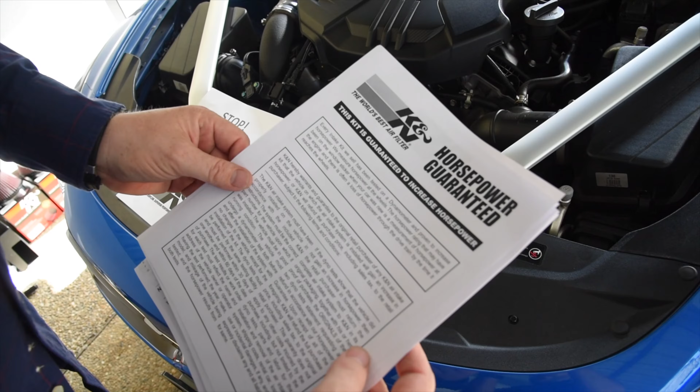This car is owned by one of our friends. Given how restricted the factory intake was, we were keen to get our hands in the engine bay and get rid of it. Replacing the factory system would be one of K&N's Typhoon intake systems.

This kit is named 695318TS.

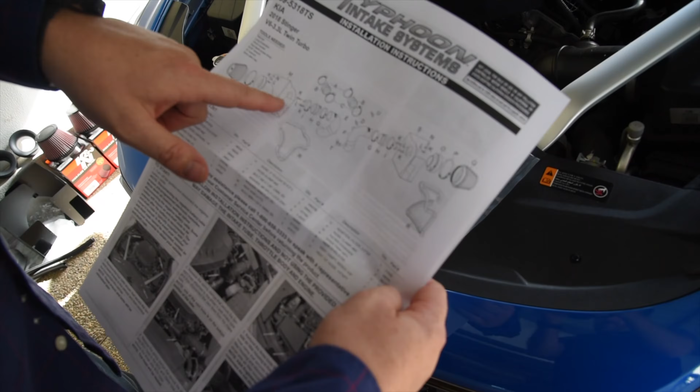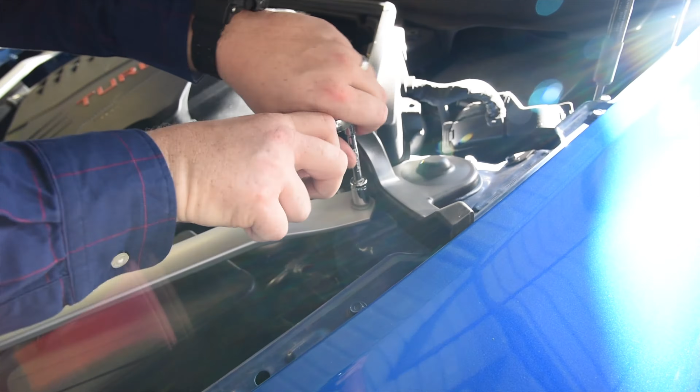The system consists of a cold air intake system which features mandrel bent aluminium intake tubes for each side, a washable reusable high flow K&N air filter for each side which comes pre-oiled, as well as custom heat shields that help protect intake air from the high temperatures of the engine bay.

K&N states this system can be typically installed in less than 90 minutes.

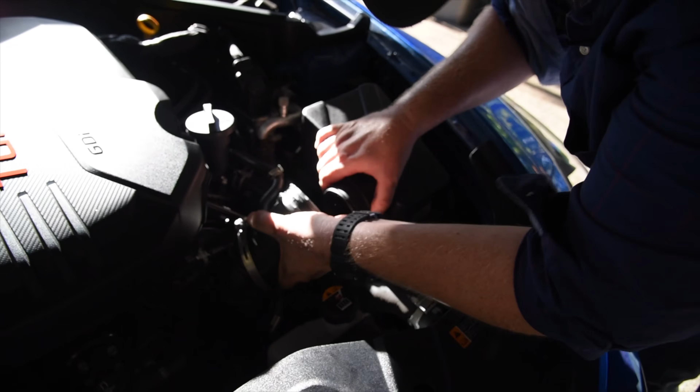The instructions say to loosen the hose clamp that secures the intake tube to the passenger side turbo and then remove the intake tube from the vehicle.

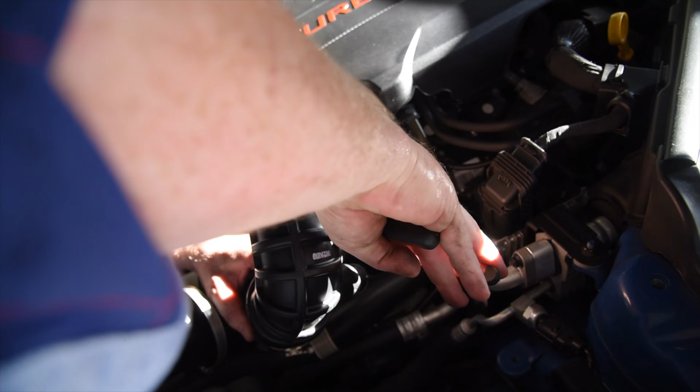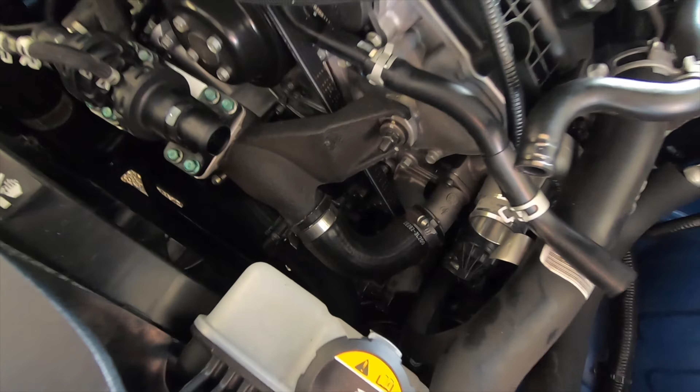Alright, as you can see, all the air boxes are out now. You've got the turbos just down here, we can see the inlets. And all the plastic and all the hardware and hosing and clamps and stuff is all out of the engine bay. Now we're up to number 10.

Basically this side is where we start installing the adapters that sit within the engine bay itself. These act as a heat shield.

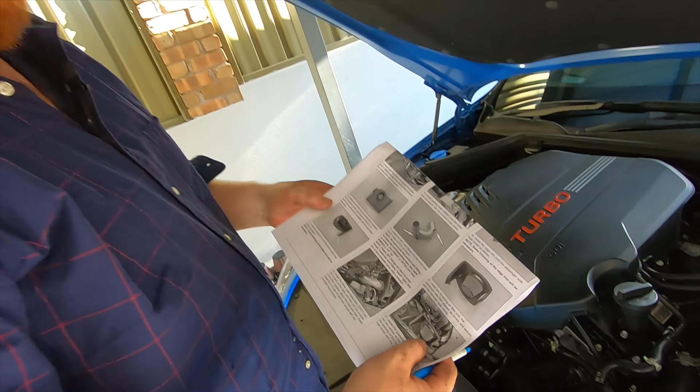This is the driver's side heat shield, and the way we know that is there's a serial number here. This ends in 253. And basically on this parts guide here, it's got under M, this is 253. So this is the one we need to do. So let's go back to where we were.

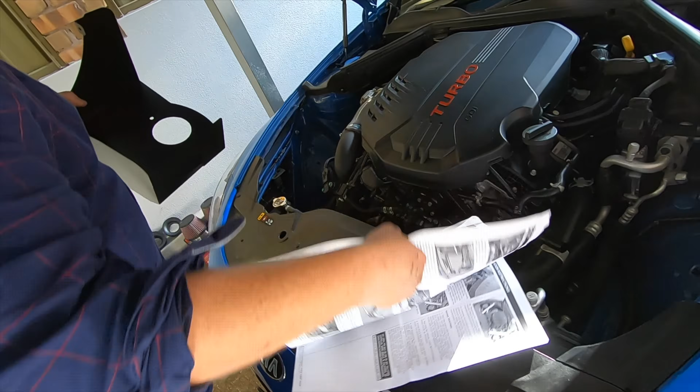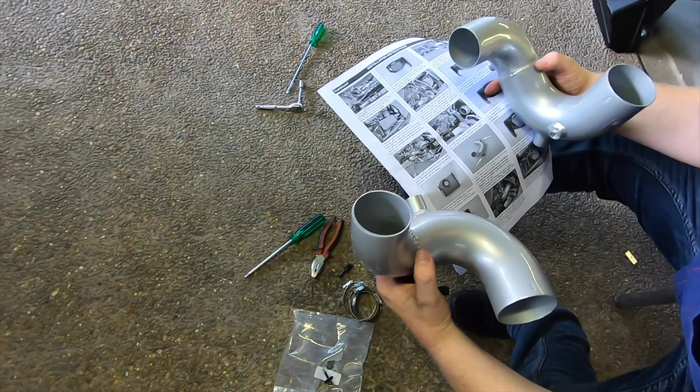Now the real point of adding this K&N Typhoon intake system to this Kia Stinger GT is purely to gain some horsepower. Through K&N's testing, this air intake alone should add 9.09 horsepower at 5,249 RPM. That's almost 10 horsepower for an air intake.

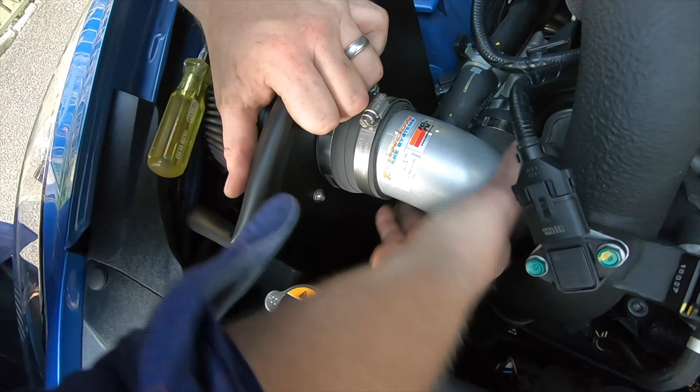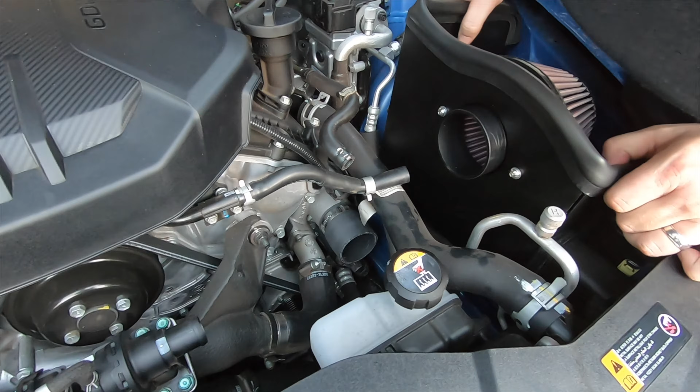Now for this job you'll see that we've only used basic tools that you'll find in most garage toolboxes. The job itself by now has been really straightforward and really easy. We found with something like this you just need to read the instructions, follow them closely and take your time.

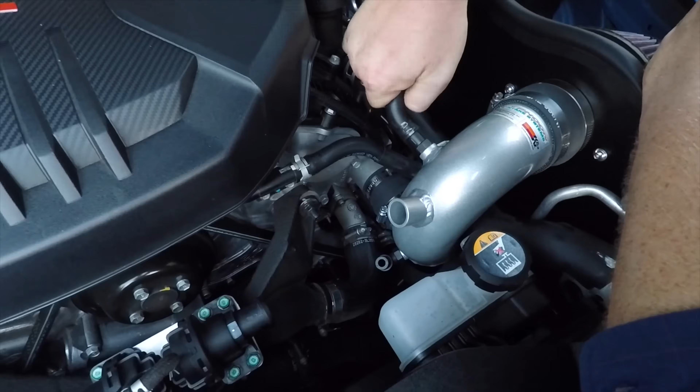Over the years we've found K&N to be a really great product. The fit and finish of all the products supplied in this kit are quality. There's no extra cutting, there's nothing else, it's all designed to fit perfectly.

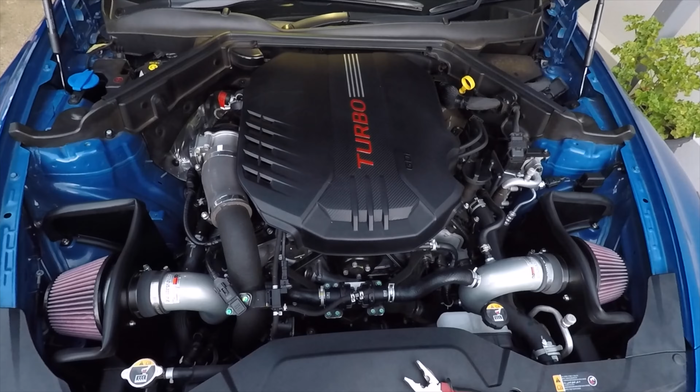Everything's all nice and secure. I mean, you could say this almost looks like a factory system, you know, it's all nice and neat. Same goes over here on this side, all nice and clean, all looks kind of factory.